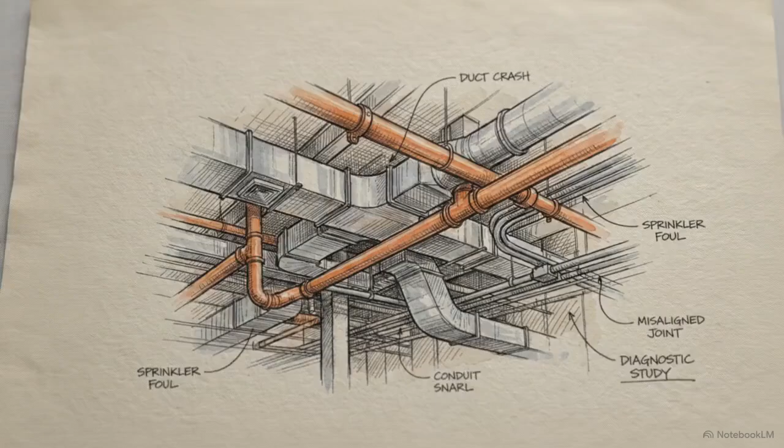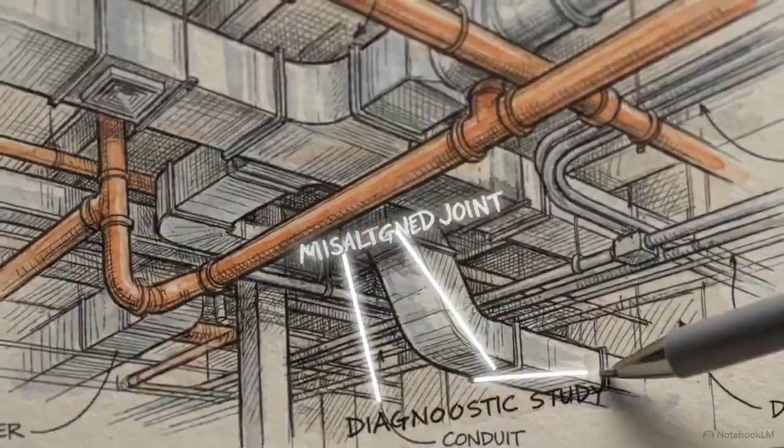On paper, a project design exists in perfect spatial harmony. In the physical reality of site execution, mechanical, electrical, and structural boundaries collide. For main contractors operating under the JBCC 6.2 agreement, managing these collisions reveals a structural paradox. The principal agent dictates which subcontractors are appointed, yet the main contractor absorbs the total liability for integrating their work.

This happens due to privity of contract, establishing a strict legal barrier preventing the employer from forming a direct relationship with the subcontractor. Therefore, all operational risk and site communication must flow vertically, making the main contractor the mandatory bottleneck. This forces main contractors to manage entities they didn't vet or negotiate with, creating an expanded risk profile that must be controlled on site.

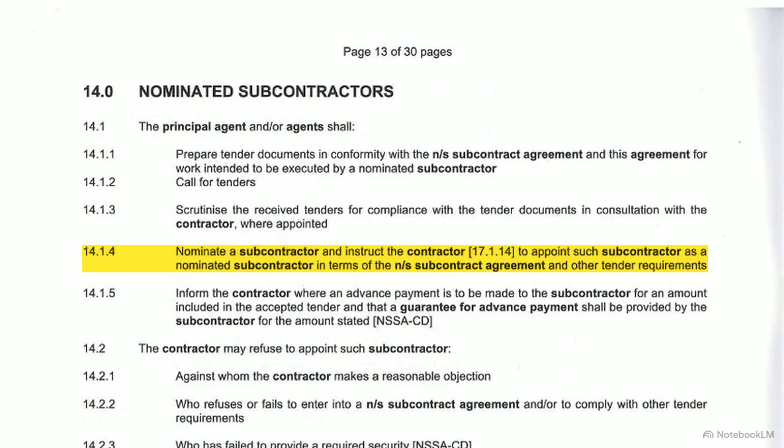Under Clause 14.0 for nominated subcontractors, the principal agent explicitly instructs the main contractor to appoint a specific entity, leaving no commercial choice. Furthermore, Clause 14.8 dictates there is no privity of contract between the employer and that subcontractor.

Contrast that with Clause 15.0 for selected subcontractors. Here, the contractor chooses the tenderer in consultation with the principal agent, offering marginal commercial control. However, Clause 15.8 confirms the privity rule remains identical. No direct contractual relationship exists.

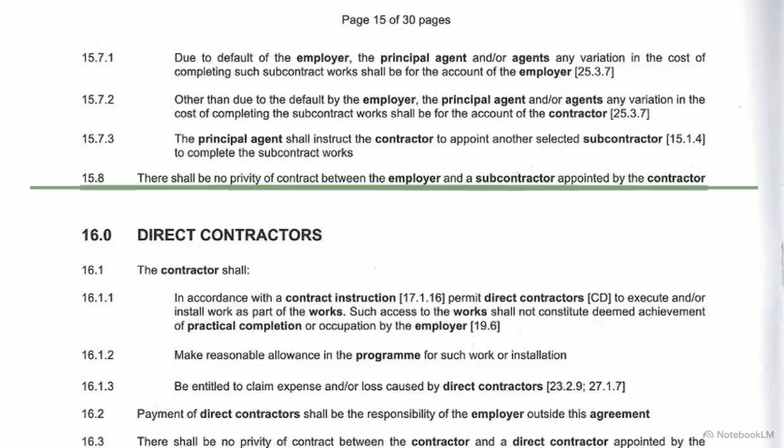The critical obligation is found in Clause 12.2.9. Regardless of whether a subcontractor is nominated or selected, the main contractor is bound by law to coordinate the program with subcontractors and direct contractors programs. While Clauses 14 and 15 dictate commercial negotiations, Clause 12 ensures the main contractor bears all costs for physical coordination failures on site. Coordination is not just a legal term, it describes the management of interfaces.

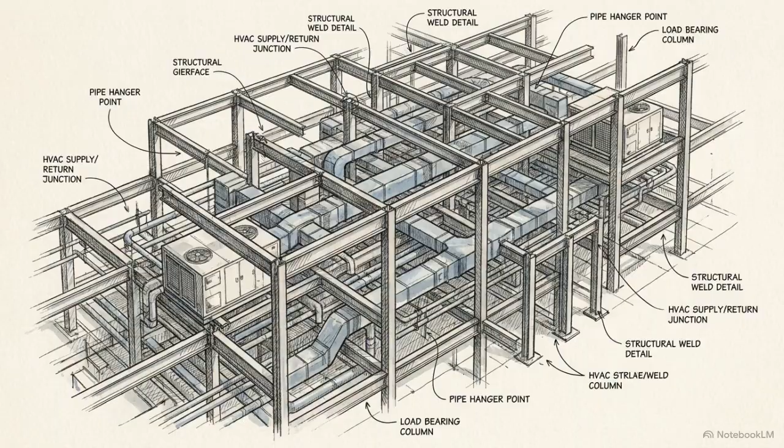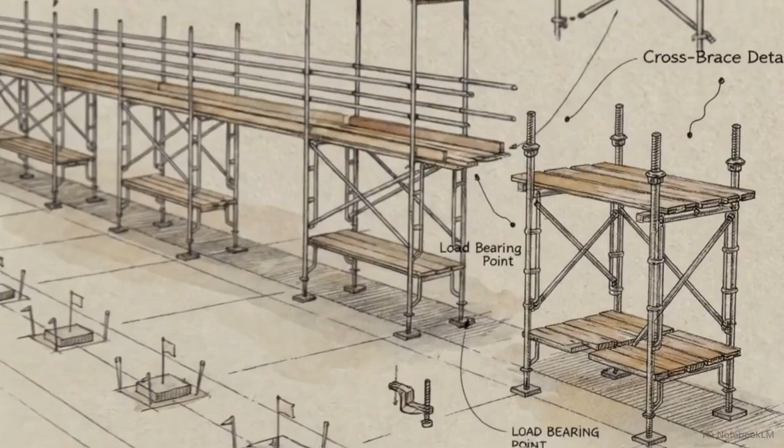These are the physical, spatial, and temporal boundaries where different trades occupy the same space. On a greenfield site, where you build from scratch on an empty lot, these interfaces scale predictably. Trades follow a standard, linear sequence from foundations through to final finishes. This changes in brownfield environments, like active hospitals or malls.

When you introduce live service tie-ins and public boundaries, the number of interfaces scales geometrically with every new trade added to the floor. Applying standard greenfield management assumptions to a brownfield environment creates an exponential increase in risk exposure across 10 specific vectors. To manage the liability outlined in Clause 12.2.9, you must track 10 distinct site risks.

1. Spatial clashes. This requires 3D BIM coordination before any physical installation begins. 2. Temporal overlaps. When trades stack in the same footprint, it will require hard-linked baseline programming. 3. Tolerance mismatches. Heavy structural variances often conflict with the strict tolerances of facade systems. 4. Design boundary gaps. This is solved through strict scope demarcation matrices.

5. Temporary works dependencies. Safe access requires formal handover certificates between trades. 6. Site logistics. Limited laydown space requires precise just-in-time delivery scheduling. 7. Commissioning sequencing. Complex builds require system-by-system integration testing before handover. 8. Substrate handover. This requires formal accept or reject sign-offs between consecutive trades.

9. Live utility tie-ins. Shutting down active systems requires rigid permit-to-work protocols. 10. Protection of completed works. Per JBCC Clause 17.19, you must actively apportion responsibility for any damage to finished work. Identifying these 10 risks provides the roadmap, but managing the resulting data volume requires a centralized tracking system to prevent minor clashes from compounding into critical path delays.